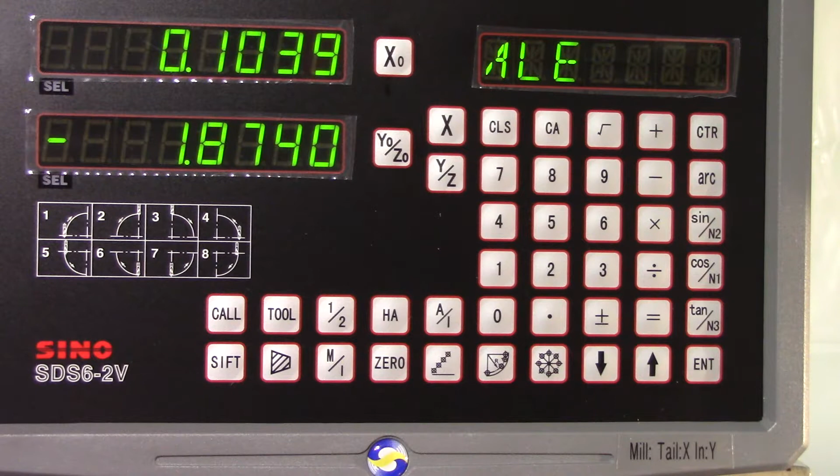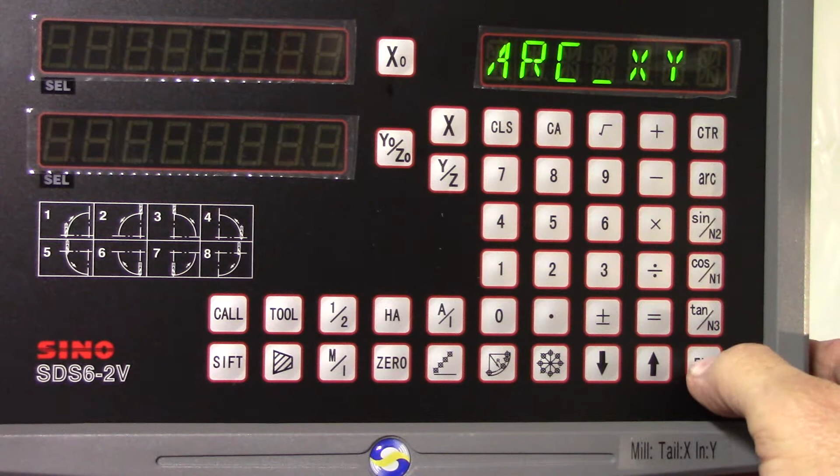So we got the piece all chucked up. DRO zeroed. Next thing we need to do is set up all our parameters and start the arc function program. That's this arc shape button down here. Smooth arc XY. The center position was actually at our radius point in this case, minus 2.97 inches. The radius is 2.97 inches.

The tool diameter, that's for milling, it's 0 for the lathe. We're going to do 2 passes. The first cut's going to be 20 thousandths for the max cut. Then we're going to start back over again using a much finer cut, but we'll have a lot less to cut.

The starting angle is approximately 31 degrees, and in this case, just like the previous one, the starting angle is really going to be the ending angle because it's going to work counterclockwise. The ending angle I have it set at 360. Now that's important instead of 0.

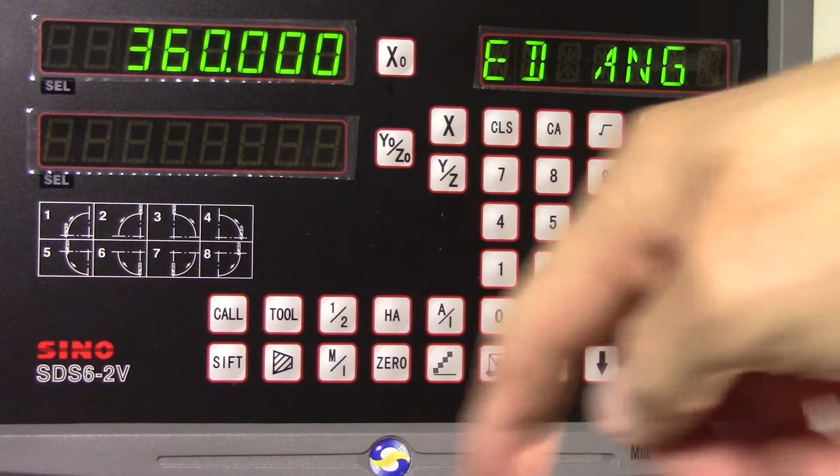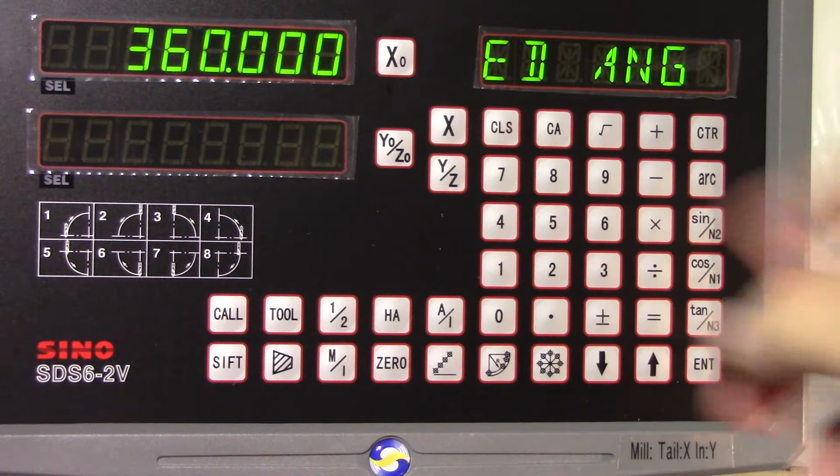By experimentation, I found if you start at 0, it'll start all the way over, or attempt to go all the way around, in this case 31 degrees shy of a full revolution. It seems to go from the lower number to the higher number. So the direction of the arc, the section that we'll do, will be the right one if we use 360 for the ending angle.

Rad plus RL, and I've shown that before. That is whether to add or subtract a tool diameter when I was making the computations. And since we have tool diameter set to 0, either of these modes makes no difference.

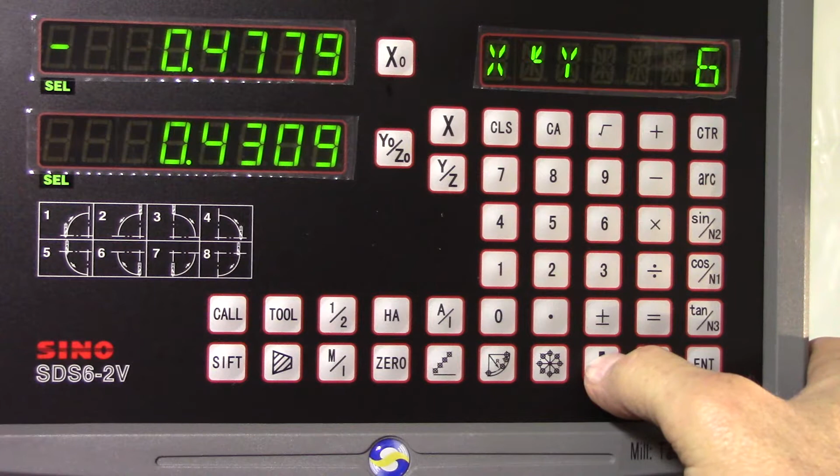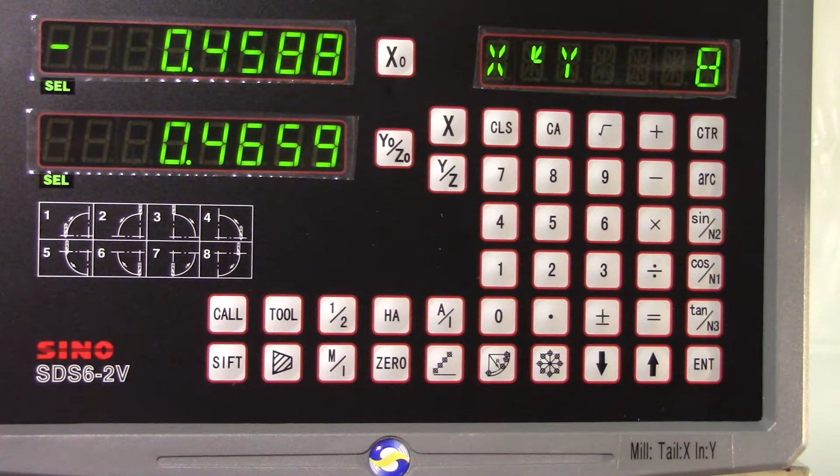Now, just like before, to get to the part that I want to actually start cutting at, which is going to be on the face at the center, and working our way toward the spindle and outward, we're going to have to go the last step. And so, I'm not going to stand here and film pushing every button all the way down there, but we'll get this thing set up, get the camera set on the piece, make the first few cuts, and then we'll move on from there. So, be back.

And now we're set up to make the first few cuts. We'll get the machine turned on and we'll have at it. We're on 300 RPM. Little juice.

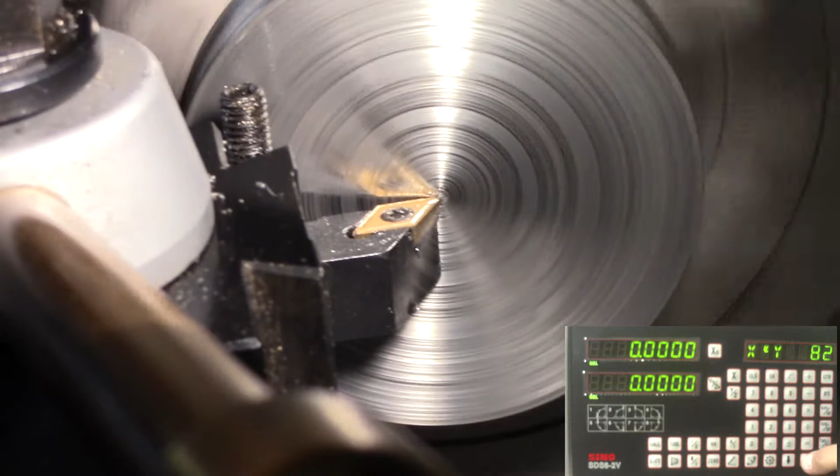The first step should really be right on the surface there. All we're really cutting off is that little nub I left to measure by. So the first step again is the last step, so we're going to be stepping backwards through this. The next step, you can see we're not really going any deeper. Curve's very gentle at this point.

We go 20 thousandths on the X. What we're going to do is come back and, unlike the previous one, we're going to move on the X first and then we're going to move in on the Y. Actually, it's 3/10 all the way going in. It's 20 thousandths back from where we were.

That's not deep enough to make an effective cut. Another 3/10, 7/10. There's something worth cutting. Brings us a total of 8/10 in on the X, or 8 ten-thousandths in on the X. We're going to move in on the Y until we get to 0. That's 1.679 and change. Now I'm just going to hand cut most of these because I don't want to overrun.

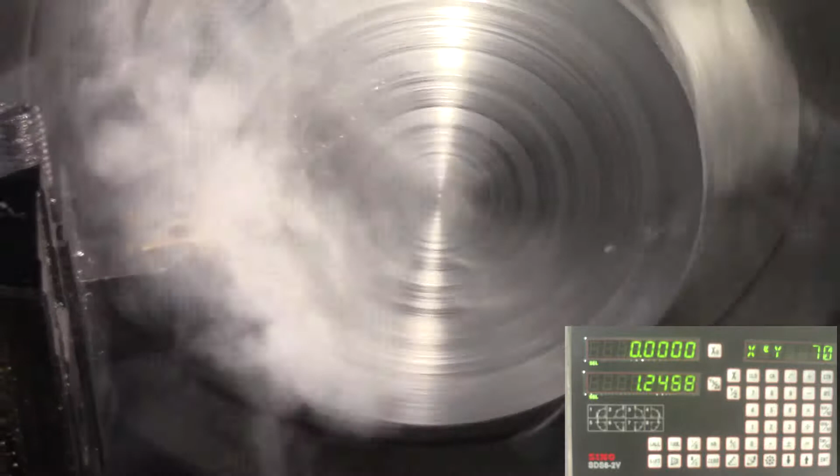There was a video Tom Lipton did. He called this coloring, making these staircases. Papa Joe reminded me of that in a comment on the previous video where we were cutting the concave surface.

The intention of this one is to get a convex surface that matches the one we cut before, but it's 30 thousandths of an inch off the surface. That way, when a piece of sheet metal 30 thousandths thick is in there, it'll be touching on both sides evenly. At least that's the intention. And if I'm careful, maybe that's the result we'll get too.

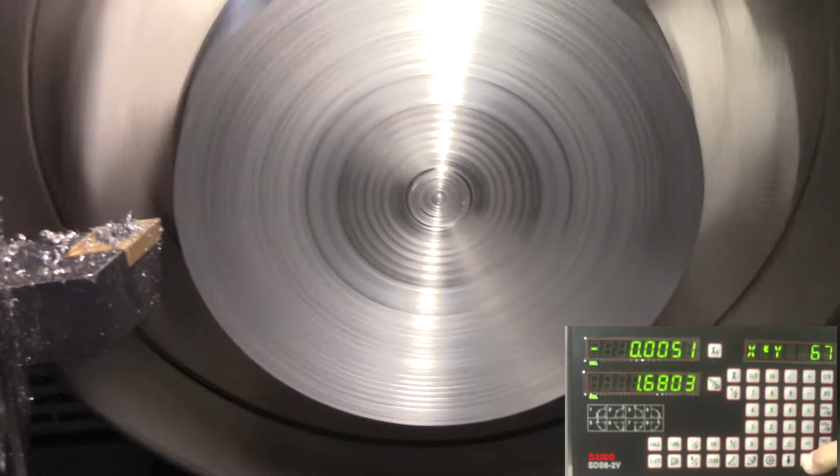Down to 30 thousandths. 6, 3. There. Don't worry about the finish moving back. All this is going to be cut away. We're going to step until we have a decent bite on the X. 1.5, 3.3, 7, 9.2. We'll make the next cut. Then we're going to go back over, repeat the program with much finer steps, and we'll trim these more or less staircases into very fine ones.

All right. Let's actually move the X before we start trying to cut. Like I say, we're just hand feeding here. I can hand feed about as fast as I would dare auto feed. Because if I overrun taking this in on the Y, we're going to spoil our piece of work.

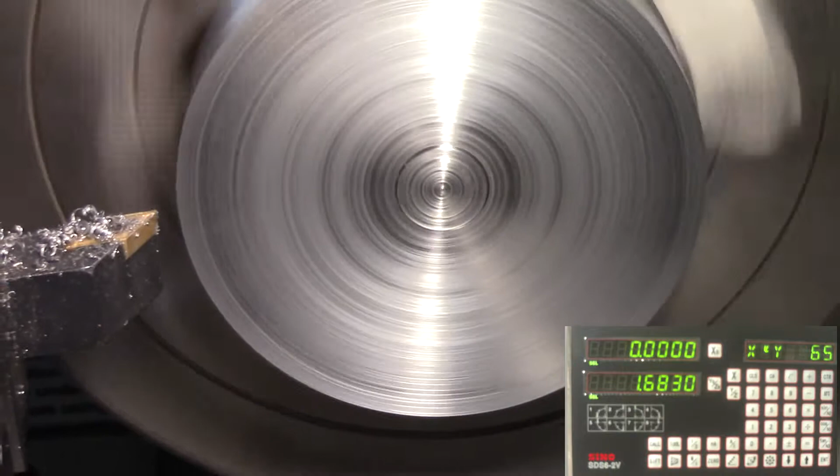All right, back. We're going to do the last cut. And we're going to have to clean up all of this mess. But we've got to make about a 10 thousandths inch cut, but only about 400 thousandths long. The steps will get larger in X as we go along, and smaller in the Y. Just a 1/4 inch left. Eighth of an inch. About a 16th.

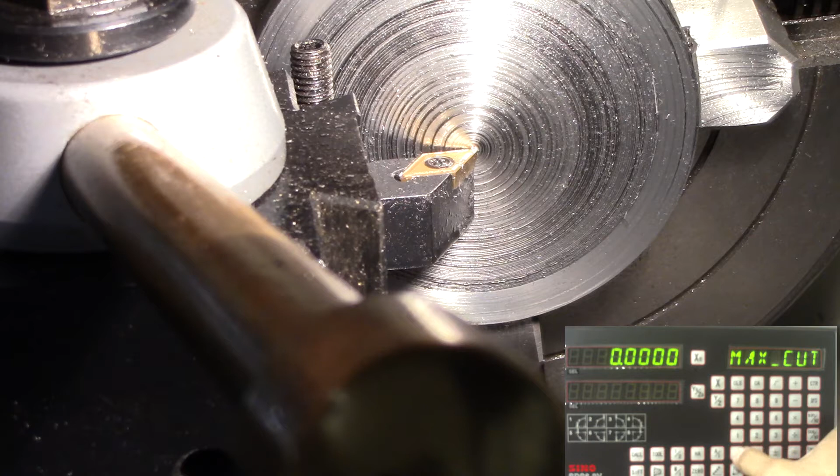So we put the radius, again, this is just the same as what we had, same center position, same radius, same tool diameter. The max cut, this is what we're going to change. We're going to change it to 0.005. That's 5 thousandths. Same start angle, end angle, rad plus RL.

Okay, we got to the last step. I had the initial position at 0, 0, the actual position, and over there it shows me that this is the start point. So that's kind of like a double or extra check. Now we're gonna back up the steps until we have some amount of X distance to cut. There on 1/10, and we'll back out the Y.

All right, well, we'll crank this up. I'll make a small number of cuts, and then we'll just cut the camera, move on to the end. It seems like most of what we're cutting here is air.

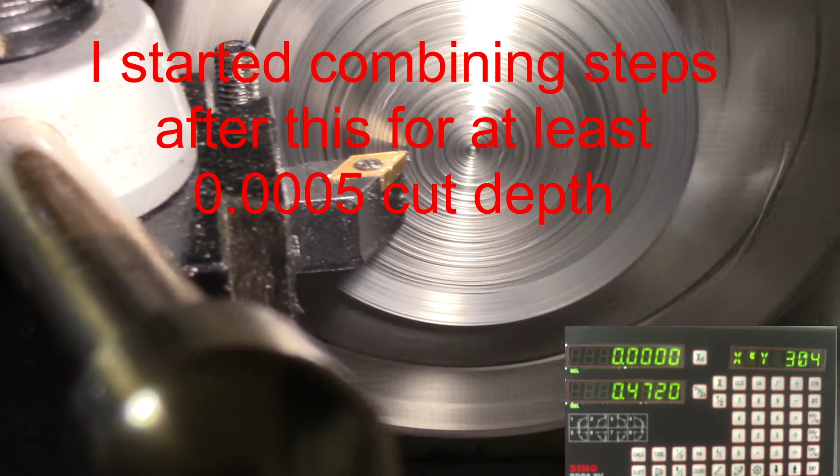Okay, that's how we do it, and you can see it's very slow. I'm gonna keep on going till we get done, and then I'll show the finished product.

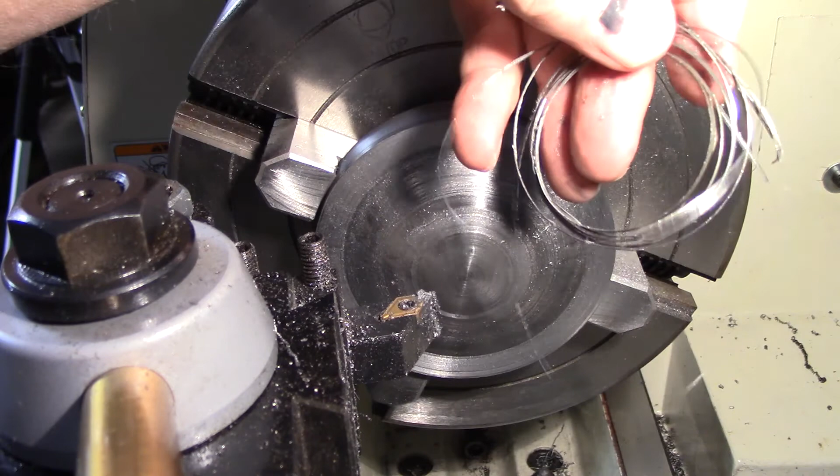And when I did it, a lot of the cuts, they're too small, and the bit doesn't dig in. It just sort of pushes the metal until it finally gets thick enough and lops it off. So I ended up having some shavings like that. Just a big mess. But I got it done and it was pretty smooth.

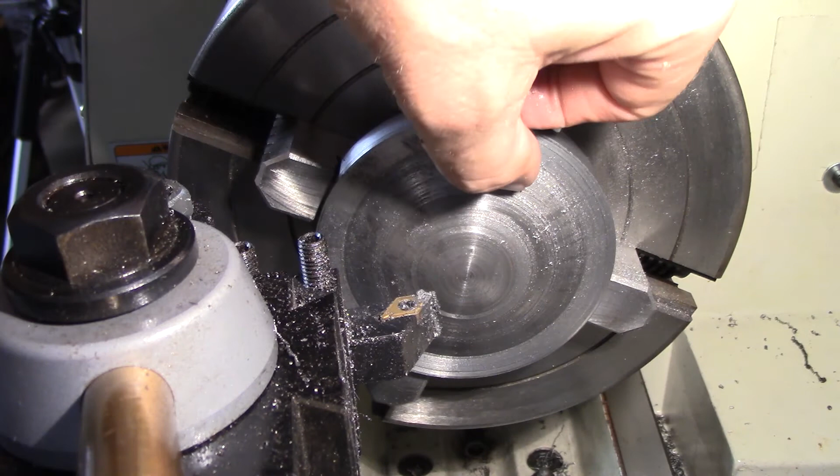You can feel the steps are larger on the outer edge and it's smaller as you move in. And you can feel with your fingernail the slight edge out here. But this all in the center is very smooth. Can't feel it with your nail.

But it's not going to matter much because we're going to take some Scotch-Brite. Well, actually some emery and then some Scotch-Brite. I'm going to clean that up to make it pretty smooth. And that'll be our male die. And we're going to pair that up with the other. And we're going to be doing some more work to this.

Thinking about putting a texture, electro-etching the texture on the edge. Faces, cutting faces, pressing faces of these two blanks. And then maybe I'll case harden it. I've got a torch, I've got some cherry red. I may try that. Although for pressing sheet metal, I'm not so sure that it really needs to be all that hard. But we'll plan it out, and if I get anything done with it, I'll make a video.

I'm going to change the format around from the last one. I'm going to put the math after the turning here because I'm sure there's a lot of people who simply don't want to be bothered with the math, and there's others who perhaps might like to know what it takes, and there's a little extra figuring to get to this, and so that'll be on the remainder of this tape. And if you don't want to see that, you can log off now.

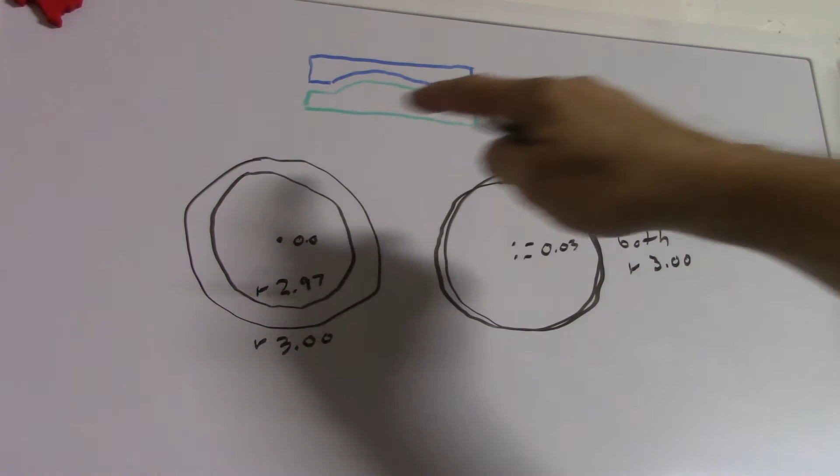So we have to think about this. The first reflex might be, well, it would both be the same, and if you moved them up 30 thousandths, it'd be parallel all the way across. That's not right. If you had two circles, they were both 3-inch radius, and you had the centers 30 thousandths apart, they would inevitably intersect. Try and draw it yourself with a compass. A neat drawing, you'd find that they would intersect. They couldn't be parallel because at two different points they touch and pass through.

What would be parallel is a radius that's 30 thousandths less than the other. And that'd be the same distance all the way across here. So it answers the question, what should we have for a radius? Now we have another question then, where should we put the radiuses? Should we put them 30 thousandths apart? Well, actually, no. We want that essentially to be concentric with what would be an upside down version of the concave that we cut.

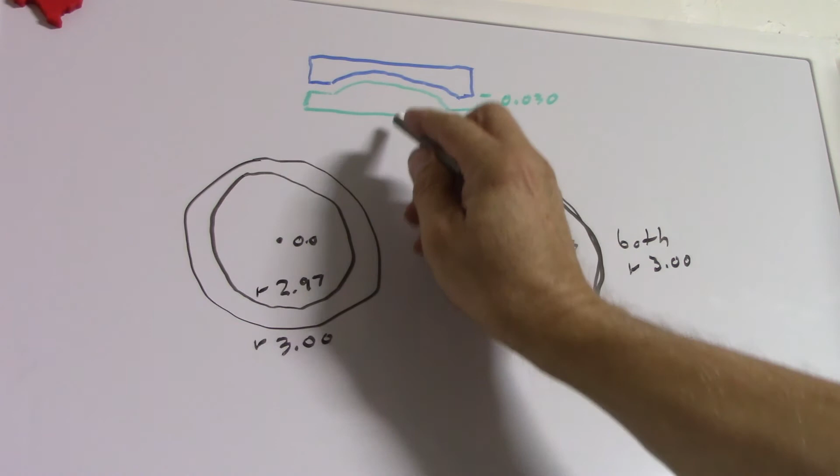And so we need to have this height H, as it was in the previous formula, the same between this and this. Now we offset that 30 thousandths, but we have a 30 thousandths smaller radius. Those two cancel each other. So it means that for this convex, we want to have the radius point 2.97 down from the peak of that. So we've answered that question. We know what R is.

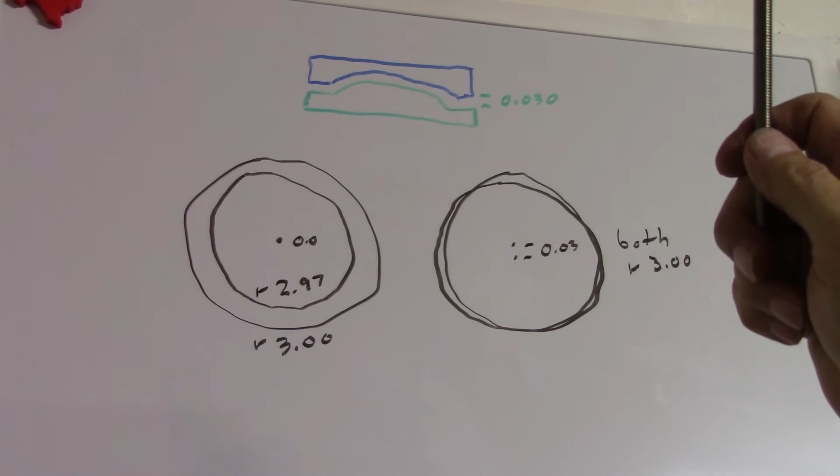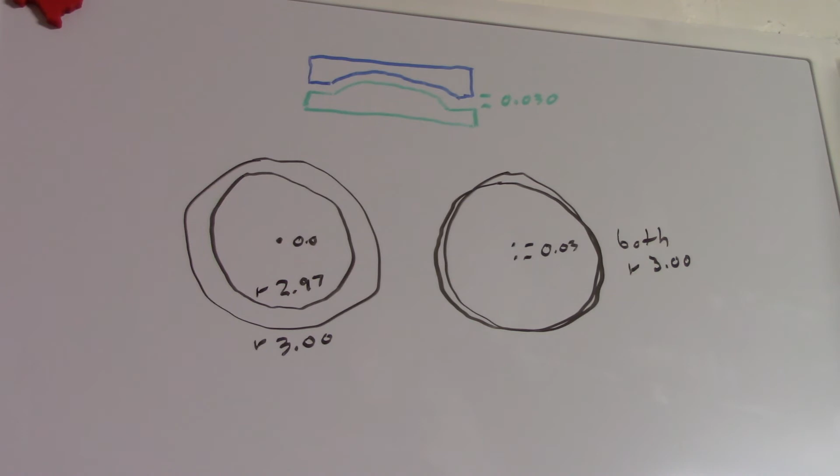We also know that H is 0.4091; we had worked that formula for the last one, so we want to match the concave portion. That means we have to calculate a new chord distance, C, and a new angle. And I'll erase the board. I'll put the formulas up there that you use. And we'll run through just the highlights of it and solve them, because I know that I'm not a math teacher, and many of you either don't need a math teacher or don't want to be bothered with learning math again. So hang on, let me redo the board.

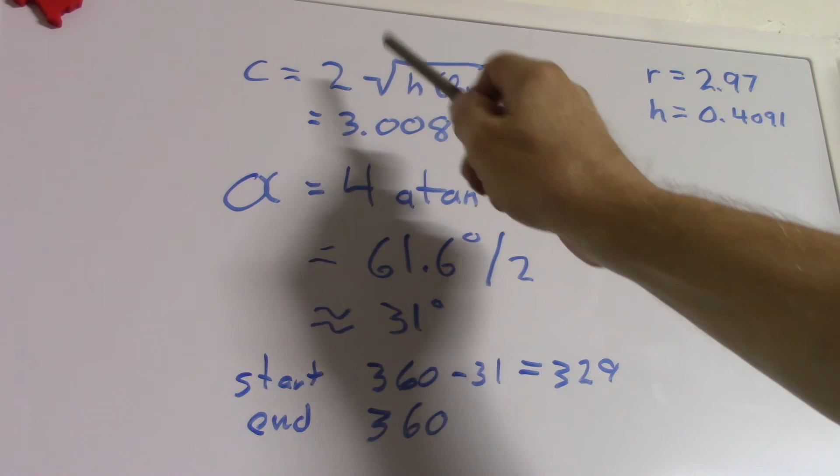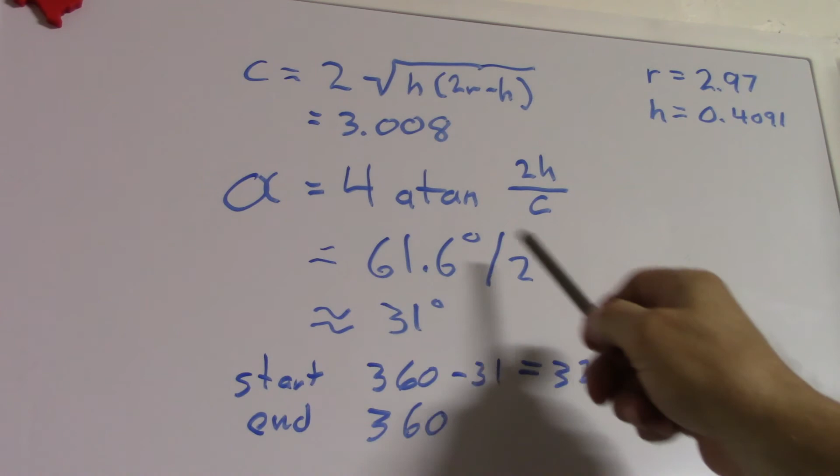Okay, I have the formulas up there. We calculate C. So we know R and H. And we can plug those into that formula. We come up with 3 inches and 8 thousandths. And the angle is the arctangent of this 2H over C times 4, which comes out to 61.6 degrees. Again, since we're using a lathe, we only really need half that angle, because the other half is reflected as the piece turns. So that's approximately 31 degrees. So we're going to start our cut at 360 minus 31, 329. We're going to end at 360.

So that's how I came up with the parameters that we used at the beginning of this episode to put into the program for the DRO to cut the block. And I've already checked that they're just right. You know, you put them together, they don't fit because they're not parallel at touch. They're parallel when they're 30 thousandths apart. And we're going to do some more work with them in another episode. Until then, we'll just move on.